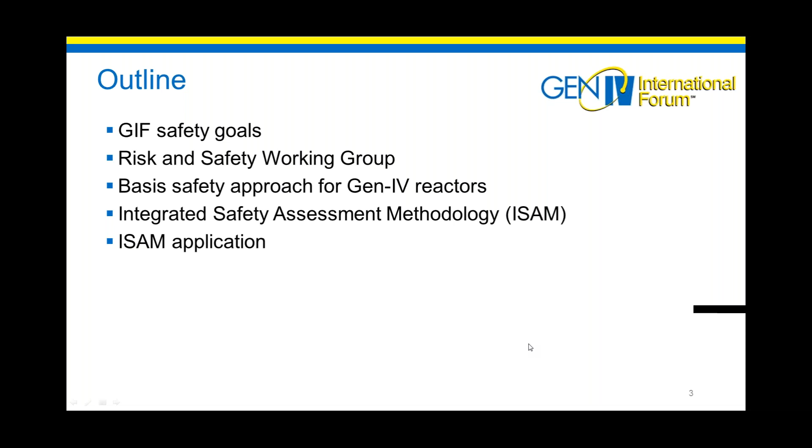So let's start with the recall of the Generation 4 safety goals. As you well know, at the beginning of GIF, a technology roadmap was drafted where a set of goals were put in place for 4 main domains: sustainability, economics, proliferation resistance and physical protection, and indeed safety and reliability. These goals were put in place to stimulate the search for innovative systems and also to motivate and guide the research and development on Generation 4 systems.

As concerns safety and reliability, we have 3 goals. The first calls for Gen 4 system operation that will excel in safety and reliability, systems that will have a very low likelihood and degree of reactor core damage, and finally, Gen 4 systems that will eliminate the need for offsite emergency response. We will shortly see the interpretation of these goals into the safety approach for Generation 4 systems.

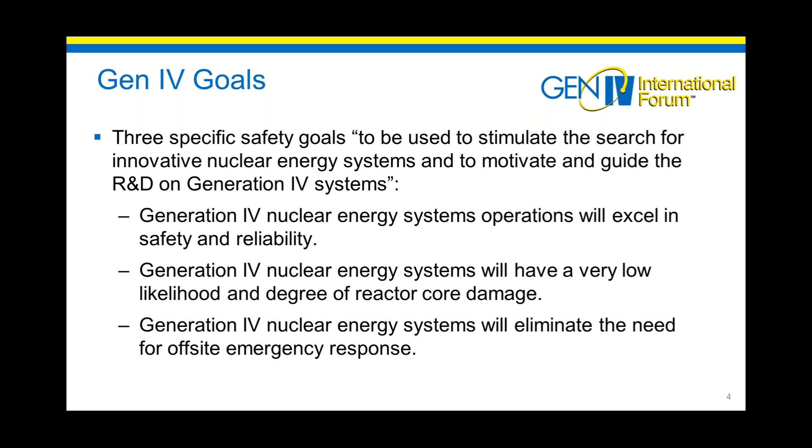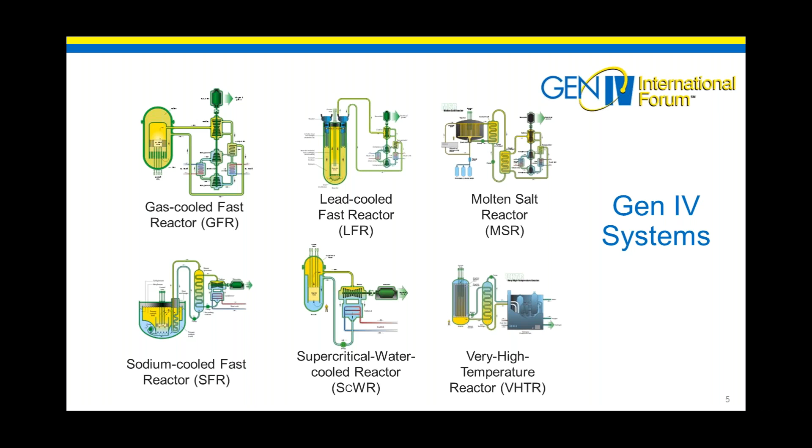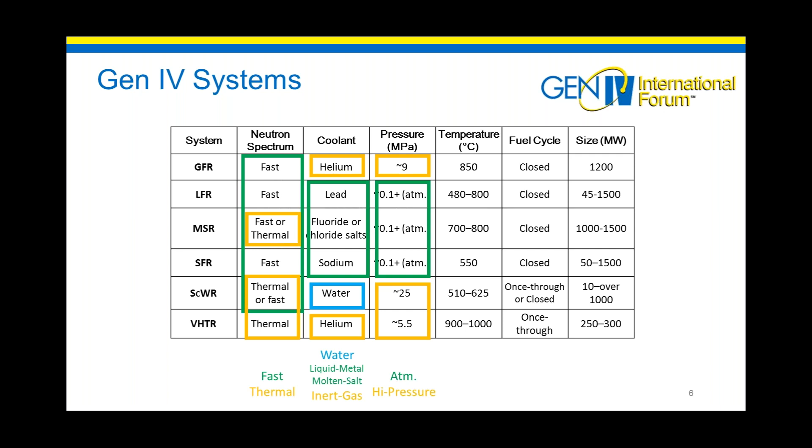But a first point that I want to raise is the fact that these goals, as embedded into the Generation 4 International Forum, should be applicable to all 6 Generation 4 systems, despite their very different characteristics. In fact, you can see in this table all the differences that the 6 systems have in terms of, in particular, neutron spectrum, type of coolants, and operational pressure and temperature, as well as differences in reactor size.

It's clear then there was a need to have a harmonized approach on safety for Generation 4 systems. And this eventually led in 2004 to the establishment of the Risk and Safety Working Group, which is one of the 3 methodological, cross-cutting working groups of GIF. The RSWG had in particular the objective to promote a consistent approach on safety for Generation 4 systems, define the safety principles and objectives based on Generation 4 safety goals, with a clear view to guide safety-related R&D activities, and finally the development of a methodology that could be technology neutral, and that could lead the safety assessment of Generation 4 systems.

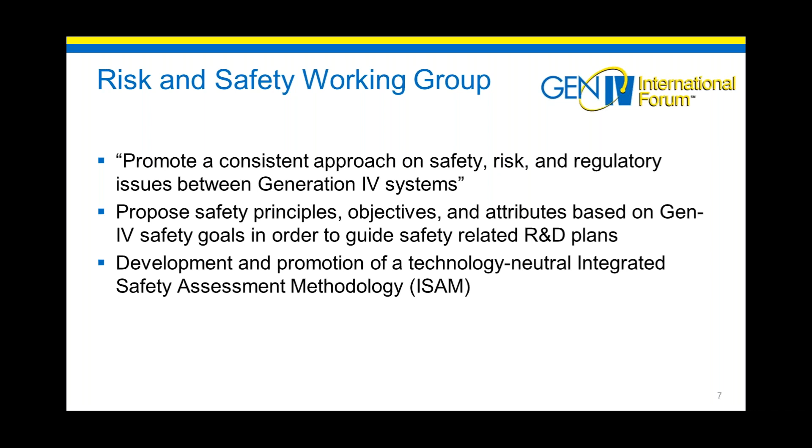Let's see now a bit more what are the main aspects of the Generation 4 safety philosophy as developed within the Risk and Safety Working Group. So, first of all, considering that the safety objectives of the so-called Generation 3 evolutionary light water reactors are already very ambitious, there are still margins for further improvement and then for a higher safety level for Generation 4 systems, considering essentially the combination of inherent advanced features due to the innovative technology and, very important, an early application of the safety approach, or a safety philosophy, so that we can achieve a robust design in a way that safety is already from the preconceptual stage built in the design itself rather than added on.

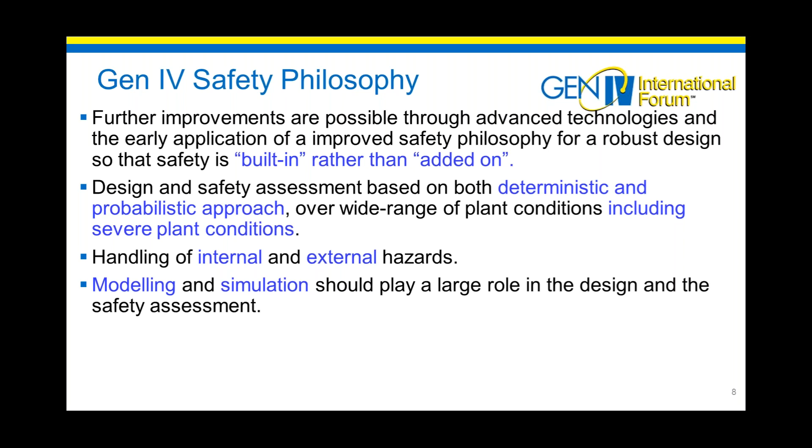In second instance, the Risk and Safety Working Group recognized the utility to base the safety assessment on both the deterministic and probabilistic approach, clearly to the extent and limits of the available experience in potential very innovative technologies. Another point is clearly that the design should address all plant conditions, including severe plant conditions. Design should also take due account of internal and external hazards and should make use as much as feasible of modeling and simulation activities in the design itself.

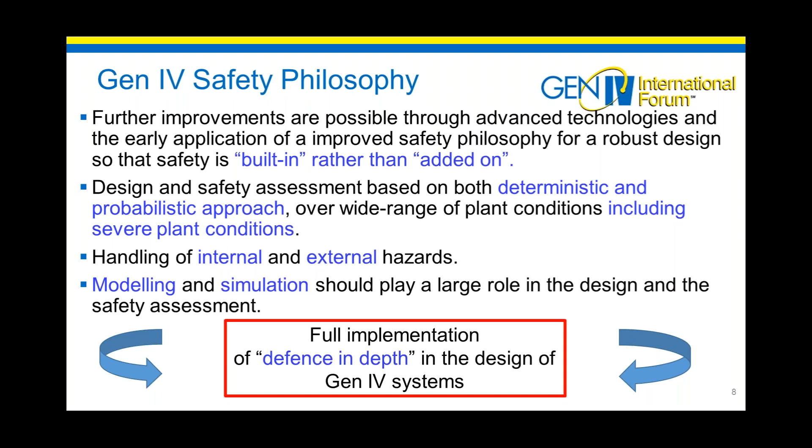In summary, all these attributes essentially call for a full implementation of the defense in depth already from the early design stages of Generation 4 systems. And this is somehow in line with the same safety and reliability goals that as well can be summarized as looking for an enhancement of the defense in depth in the design. In fact, when we talk about excellence in operational safety and reliability, essentially, we are addressing the safety during normal operation and anticipated operational events, focusing really on the reinforcement of level 1 and level 2 of defense in depth.

Then when we talk about very low likelihood and degree of reactor core damage, we want to minimize the frequency of the initiating events, introduce specific design features for the control and the mitigation of accidents in order to avoid core damage. So we want to reinforce level 2, level 3, and in general the design for severe accident prevention. Finally, when we talk about eliminating the need for offsite emergency response, we look at a comprehensive safety architecture that is able to manage and mitigate severe plant conditions and also reduce the likelihood of early or large releases. In this respect, we want, once again, to strengthen the level 4 of defense in depth, which is dedicated to the design for severe accident mitigation.

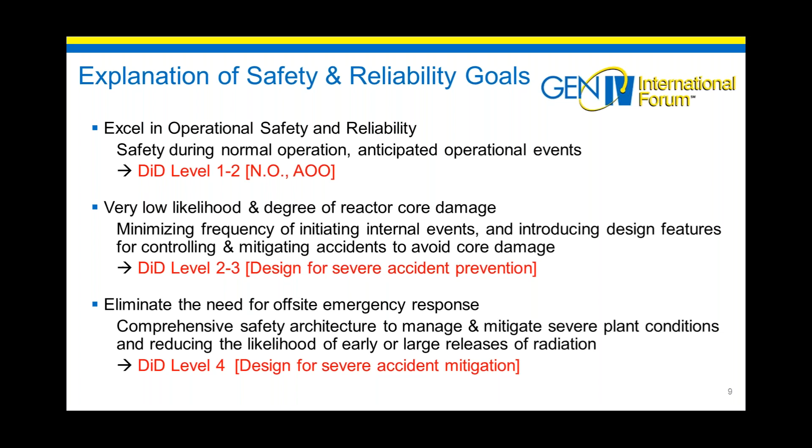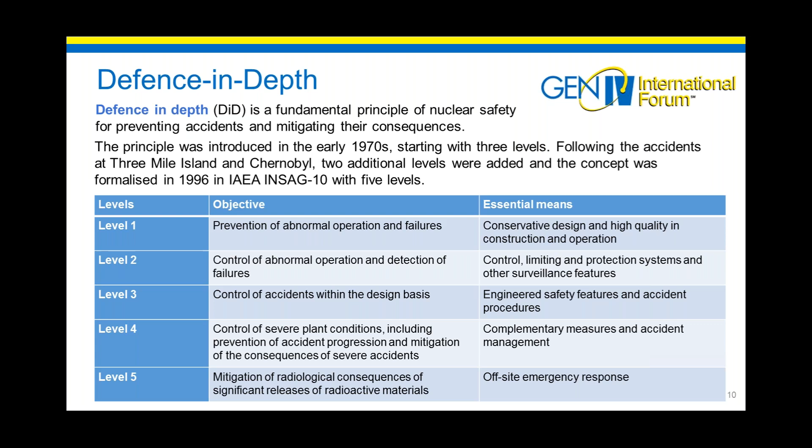So the defense in depth is already a fundamental principle of nuclear safety, and it must be preserved and even reinforced in the design of Generation 4 systems. Indeed, this is the key to achieve the safety robustness that will then lead to enhancement of the safety of Generation 4 designs. In addition, to meet these objectives, the defense in depth should be implemented in a way that is, first instance, exhaustive, so that all the risks that could affect the fundamental safety function should be identified in a comprehensive way.

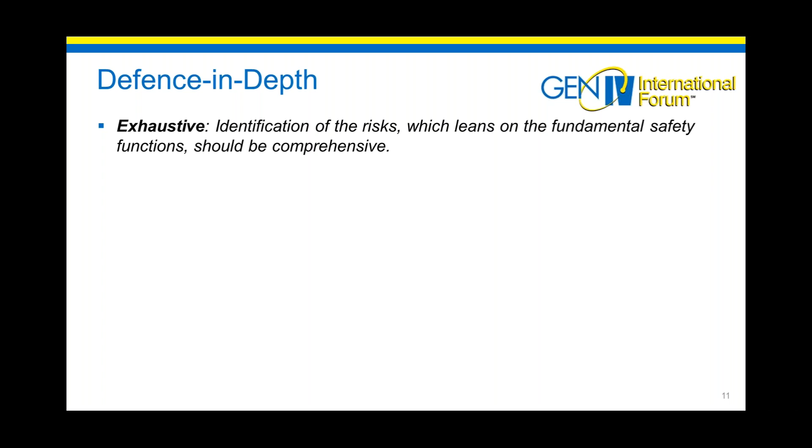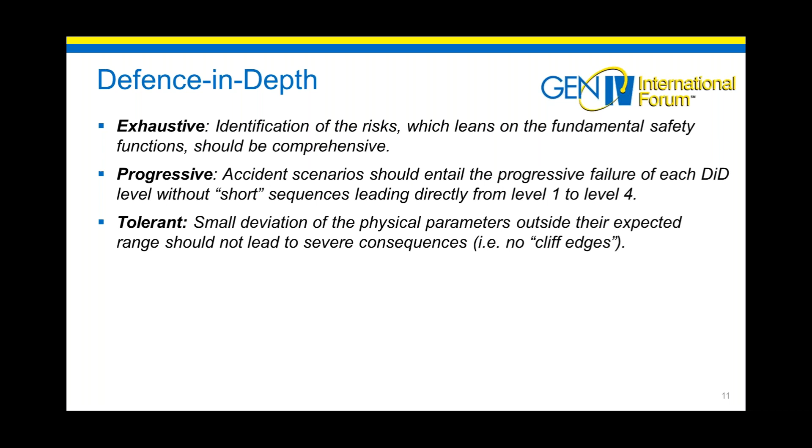The defense in depth should also be progressive in the sense that accident scenarios should eventually cause a progressive or sequential failure of each level of defense in depth, and therefore reducing the likelihood of this to happen, without having short sequences or kind of bypass leading directly from level 1 to level 4. Additionally, the defense in depth should be tolerant in the sense that any small deviation of the physical parameters outside the expected range should not lead to severe consequences. Essentially, we should not have any kind of cliff edge effect. Another important aspect is forgiveness. So assure that a sufficient grace period is allowed for manual intervention and repair during accidental situations.

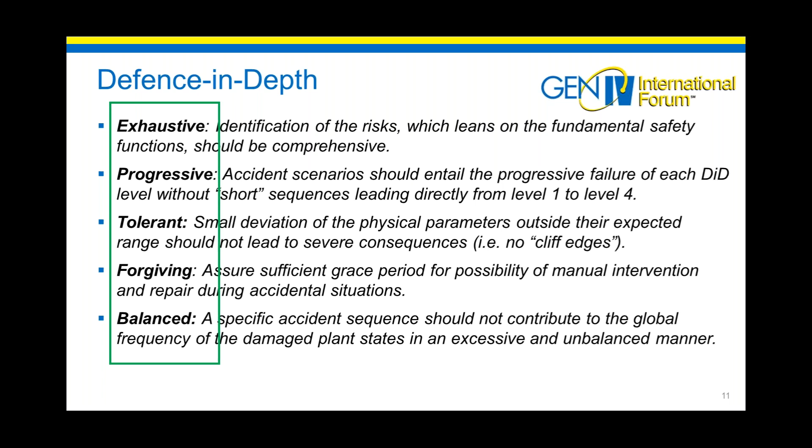And finally, the design and the defense in depth should be balanced in the sense that a specific accident sequence should not contribute in an excessive or unbalanced manner to the global frequency of the damaged plant state. These 5 attributes really reinforce the implementation of the defense in depth. And additionally, I will say the design of Gen 4 systems should also lead us as far as feasible to a simple design.

Take into account that generally simple design assures a higher level of robustness and safety. And this somehow differentiates Gen 4 systems from the high complexity experienced in particular for Gen 3 systems. I also want to highlight the fact that these attributes were actually defined in early 2008, but somehow they already answer the challenges that came after the Fukushima accident.

In fact, when we talk about progressiveness of the defense in depth, essentially we want to avoid any short sequence as what happened, for example, for Fukushima, as well as any potential for cliff edge effects when we talk about the tolerant implementation of defense in depth. And also in terms of forgiveness, to have enough time to be able to have manual intervention in case of a potential accident.

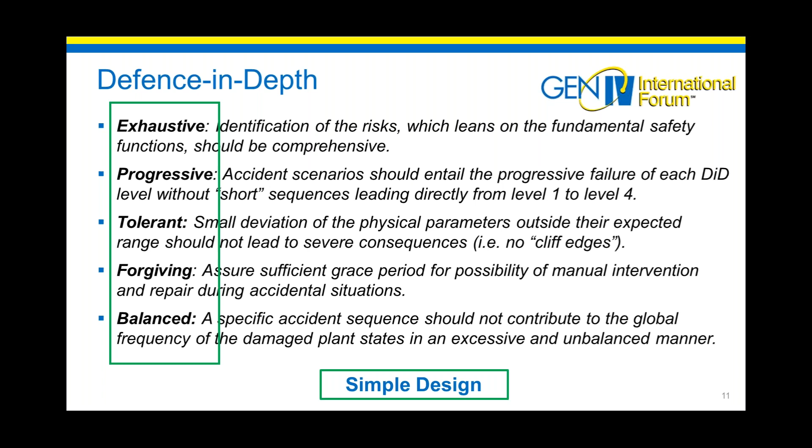Let's go now more on the basis for the design and assessment. Clearly, the design of Generation 4 systems should cover the full range of plant states, including severe conditions. And special attention should be given to severe plant conditions with the implementation of specific provisions that could be put in place against such conditions.

Additionally, all internal events and internal and external hazards have to be considered, together with eventual uncertainties that are related to the innovative features of a new technology. And this should be put in place in particular through a combination of both experimental and modeling activity. Finally, a special effort should be made in particular for the demonstration of the practical elimination of all those accident sequences that can be associated with the potential for early or large releases.

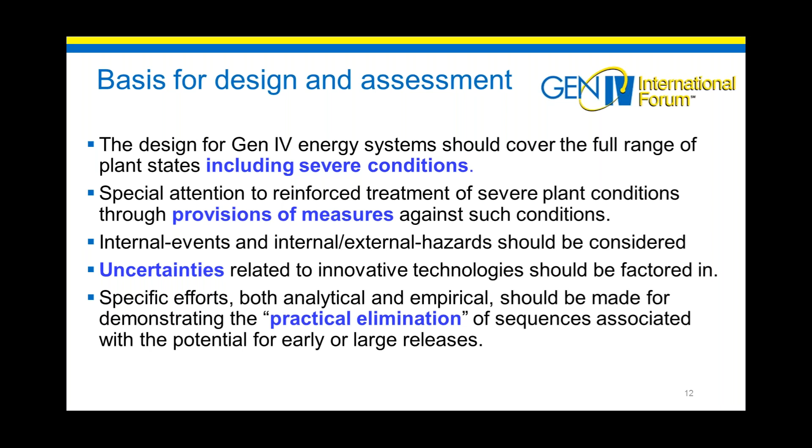So looking in particular at the plant states that Generation 4 systems should cover, essentially these go from normal operation all the way to design extension conditions, while out of design are essentially all the residual risk and practically eliminated accidents. I would like to spend some words about the notion of severe accident. In fact, some Gen 4 concepts can clearly associate the notion of severe accident with that of the light water reactor, associated with the melting of the core.

However, designs like the VHTR and the molten salt reactor cannot express potential severe accident conditions through the melting of the core, given their design characteristics. However, this doesn't mean that a severe accident, which is intended as an accident that goes beyond the design basis, cannot be postulated.

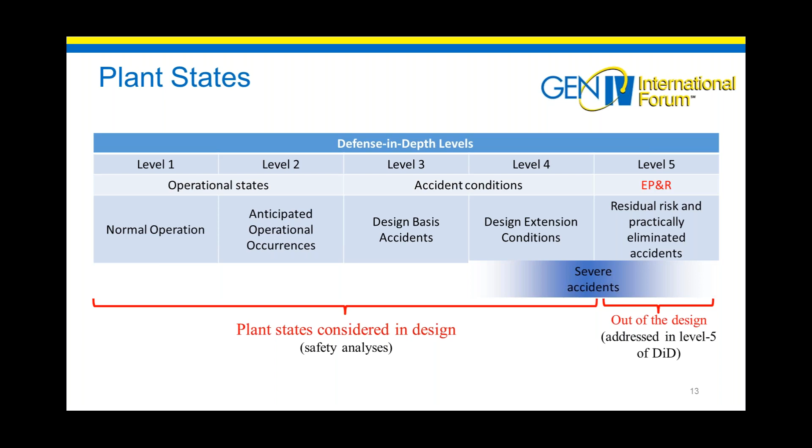So in any case, potential sequences that go beyond the design basis need to be assessed, but it's important to notice that according to the characteristics of some design tracks, the potential severe accident scenario can be put in level 4, so within the design extension, but can also be put in level 5, so out of the design itself. What is essential in the assessment is that the possible severe accident scenario is indeed considered and evaluated in a global design assessment.

So we have seen essentially what are the main principles of the safety approach for Generation 4 systems. We see now how we can assess within our design those principles. And this is essentially linked to the development of the ISAM, the Integrated Safety Assessment Methodology, that had the objective to ensure a consistent approach to safety applied to all 6 systems.

The methodology consists of 5 tools. They are not, let's say, new in their formulation, maybe with the exception of the QSR, the Qualitative Safety Requirement Review, and the Objective Provision Tree, or OPT. But actually it is really the systematic use of these tools that should ensure the consistency of the design with the safety approach for Generation 4 systems.

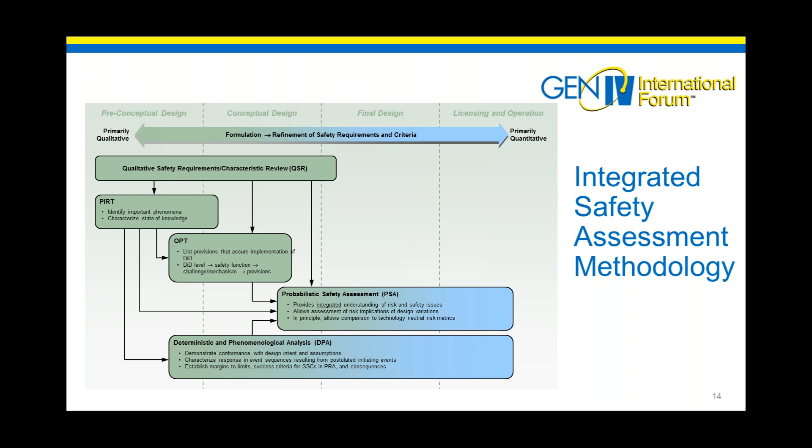The set of tools can be used separately, and essentially the methodology covers the entire cycle from the preconceptual design all the way to the final design, licensing, and operation. I will just shortly introduce each of these tools, starting with the qualitative safety characteristics or safety requirement review, or QSR.

Based on these tables, any specific design feature, so design characteristics, design system, and so on, can be assessed against the current requirements, the current regulatory framework, to see to which extent the system is in line with the current requirements.

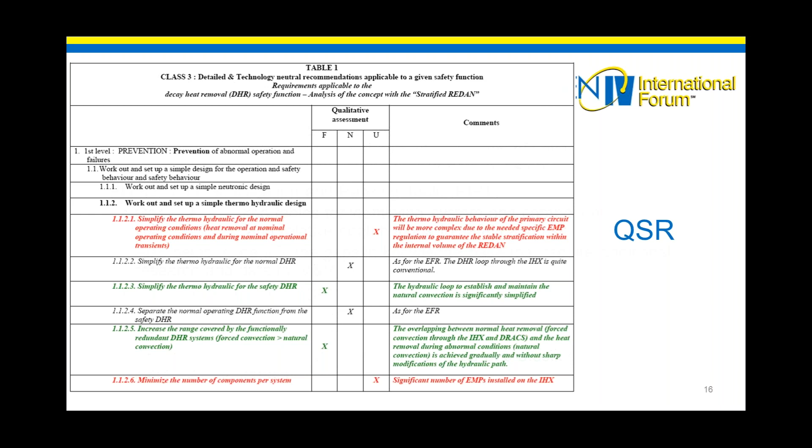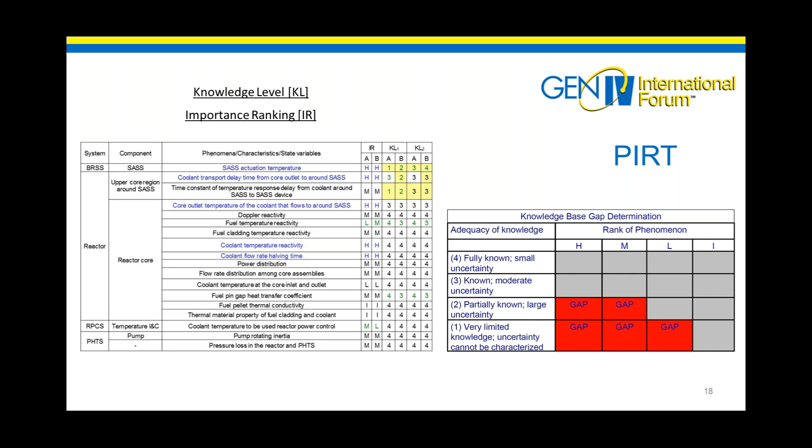The second tool is quite well known: the phenomena identification ranking table. It is a quite powerful tool to identify the gaps in terms of importance of phenomena, as well as level of knowledge of those phenomena. Indeed, this tool is quite interesting, quite powerful, to identify any potential R&D needs dedicated to the level of knowledge of important phenomena.

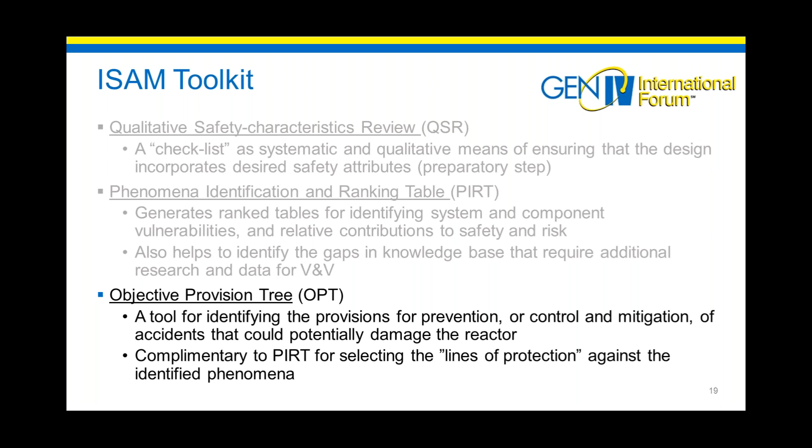Then the third is the objective provision tree. This is a rather qualitative tool that gives a graphical representation of the safety architecture, so the set of provisions that are put in place to prevent, to control, and mitigate potential accidents. In addition to identifying the risks or the initiating events, you also put in place all the potential lines of protection

against specific mechanisms. So graphically, we have each level of defense specified in terms of specific objectives to be achieved and barriers that need to be protected. And then for the different safety functions, in the OPT, we identify the challenges to cope with and the mechanisms, essentially the initiating events, that need to be prevented or controlled through a set of provisions that can be material, in the sense of system features or components, or immaterial, in the sense of procedures put in place in order to prevent or control the mechanism itself.

This is a very powerful tool because it gives an overview of the safety architecture, as well as identifies the independence of the different levels of defense in depth, and potentially identifies common cause failures that need to be addressed and can then be addressed in advance.

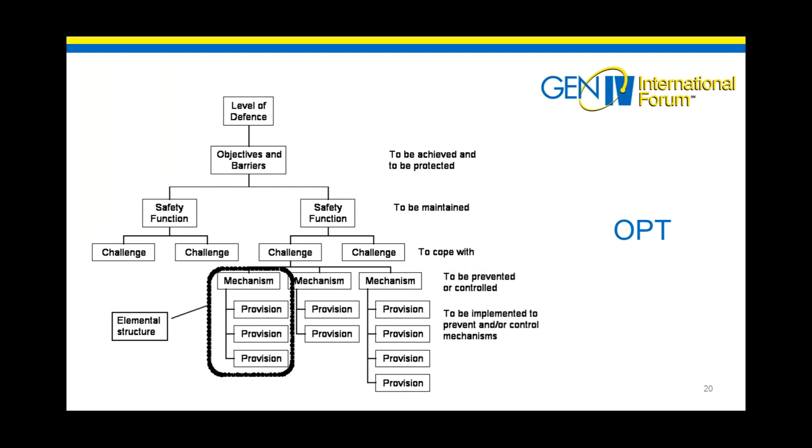And finally, we have the two remaining tools: the deterministic phenomenological analysis, which is the traditional safety analysis used to assess the response of the system to the different challenges, and the probabilistic safety analysis that defines the risk spectrum of our design, in particular to answer the three basic questions: what can go wrong, how likely is this to happen, and what are the potential consequences.

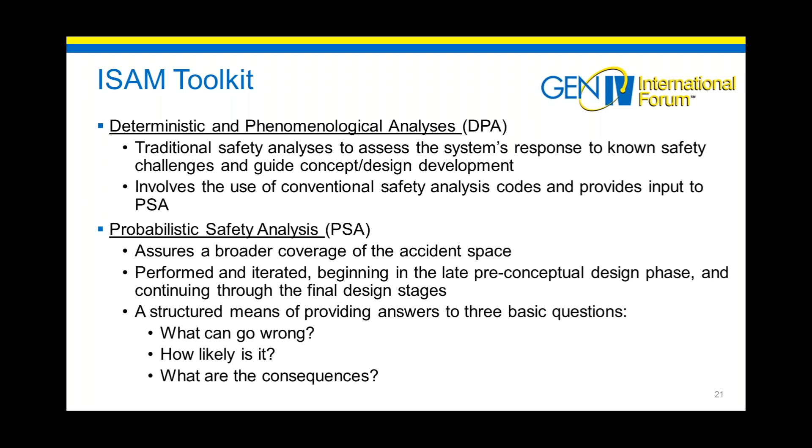So you can see here that the methodology is really a combination of deterministic and probabilistic. It has the flexibility to enhance one or the other aspect based also on the level of maturity of the methodology itself. So these are the tools. We'll see now how these tools can be applied to the safety assessment itself.

To do that, we need a definition of safety assessment. This comes from the IAEA, which identifies essentially two steps in safety assessment. The first step is the verification of the compliance of our system with the principles, the requirements, and the guidelines of the current regulatory framework.

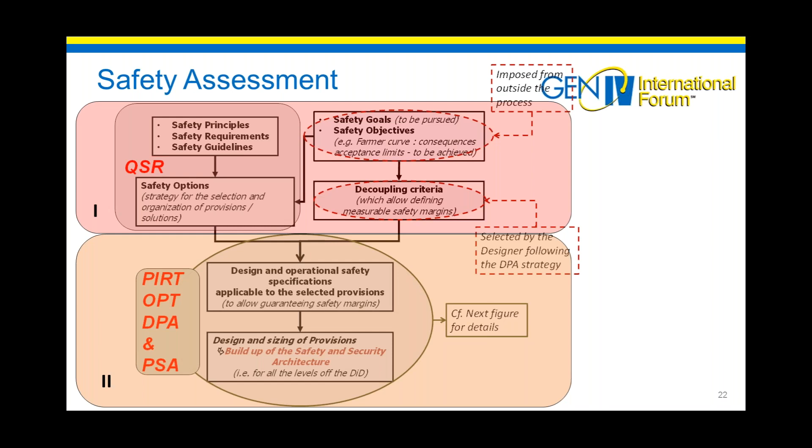The second step is the verification of the conformity of the safety architecture with the expected quantitative safety objectives. So to say, the design criteria that are put in place for each level of defense in depth, in terms of characteristic temperatures to achieve in case of accident, or in the later defense in depth levels in terms of potential release to the environment.

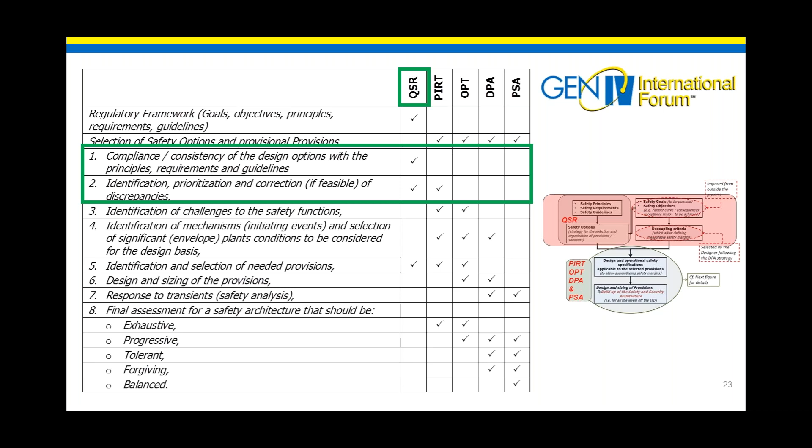In this table, we have the cross-cutting relationship between the different steps of the design and assessment process and the respective ISAM tools. In first instance, once the goals, objectives, principles, so the regulatory framework, are put in place and a set of safety options or design options are identified, the first step, as we said before, is to verify the compliance with the current requirements. This is mainly the domain of the QSR, where this compliance can be verified and a process of identification and correction can be put in place.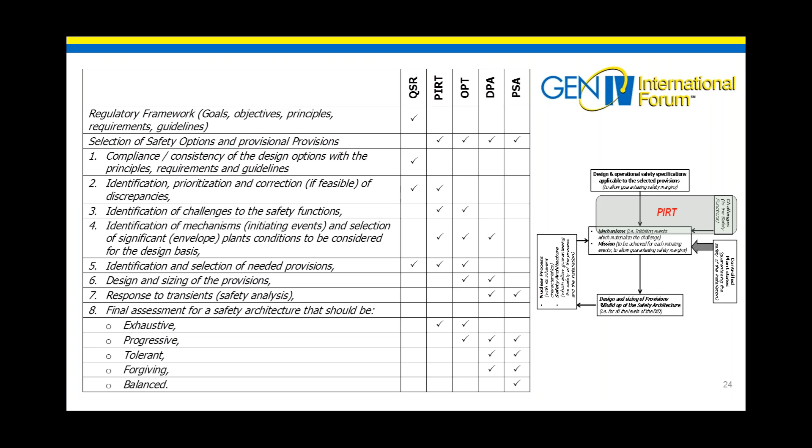Once the safety options, the design options, are put in place, then the design itself kicks in. So we have first the identification of the challenges for the safety functions, as well as identification of mechanisms, or the initiating events and plant conditions to be considered in the design. This is mainly the work that can be performed through PIRT exercises together with the OPT exercise, taking into account that the OPT also identifies, in a qualitative way, the set of provisions that are put in place in order to cope with, to prevent and to control the mechanism.

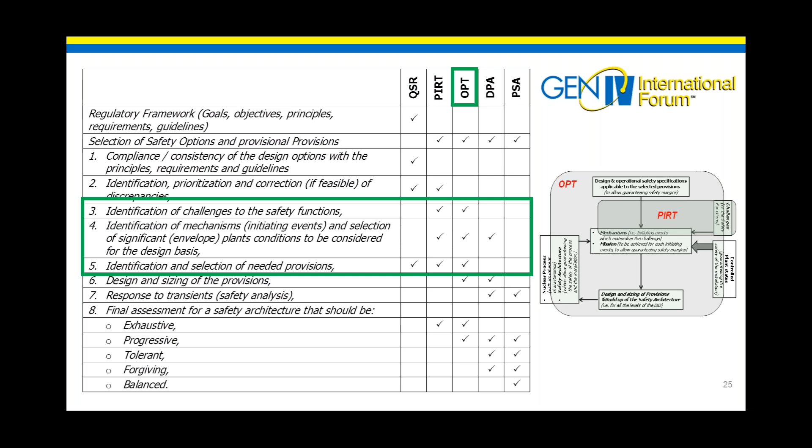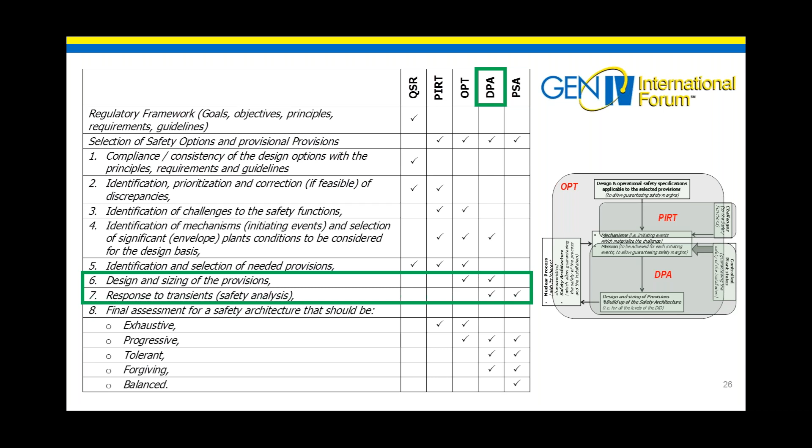Once this is done, and the safety architecture is in place, then we have the design and sizing of the provisions themselves and the analysis of the response to the transient, which is the classical, let's say, safety analysis. And this is done through the combination of deterministic studies as well as probabilistic studies, with the final assessment of the safety architecture that should be, as I said before, exhaustive, progressive, tolerant, forgiving, and balanced.

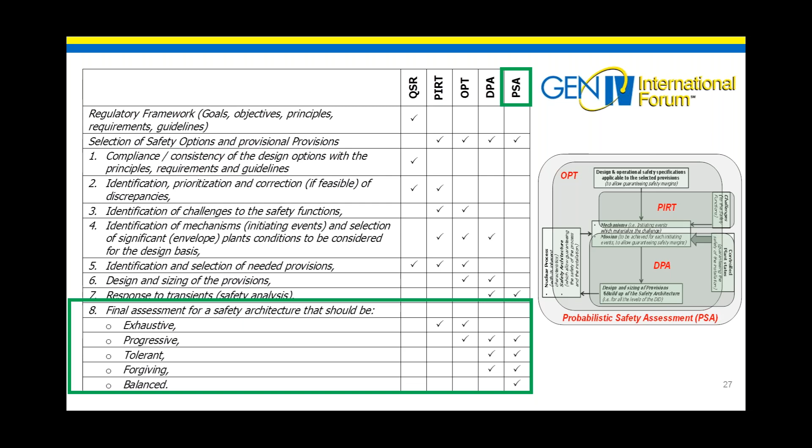It's clear that this process is an iterative process. By itself it can be very lengthy and generally time and resource consuming. But it is this way that, in a systematic way, should really ensure the robustness of the design itself.

I want to conclude with a practical example of the use of ISAM. This example actually comes from our Japanese colleagues. Please don't look at the technical detail, but rather at the use of the different tools. So the reference design is the Japanese sodium fast reactor, a loop type SFR, and in terms of decay heat

removal system, it has two primary reactor auxiliary cooling systems, so-called PRACS, that are linked with the intermediate heat exchangers, and one direct reactor auxiliary cooling system, also called DRACS, which is directly immersed into the reactor vessel.

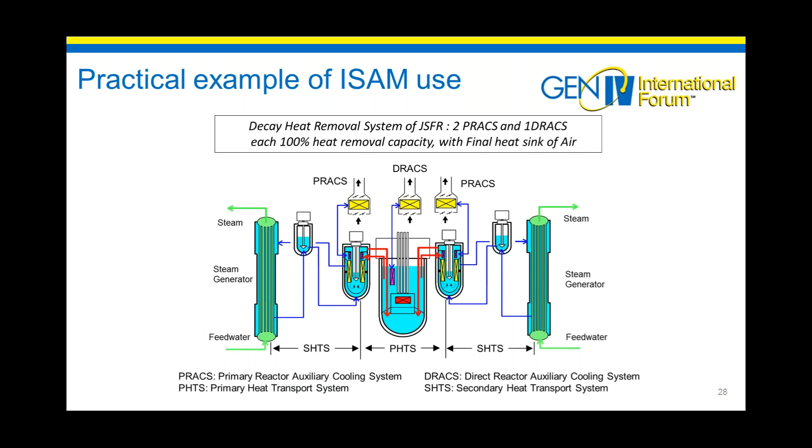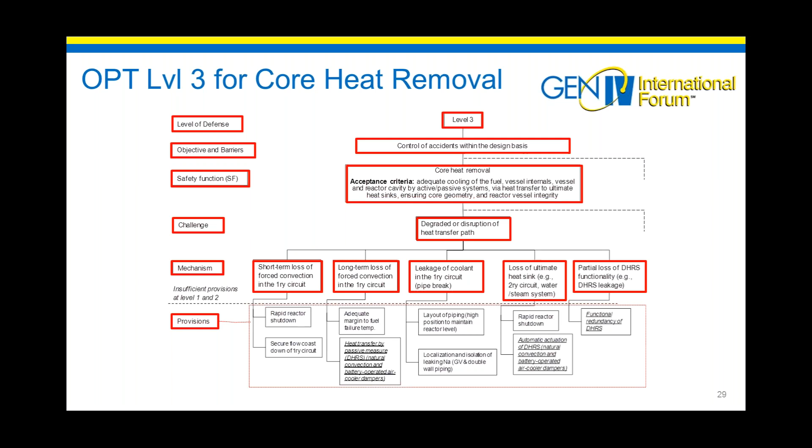So the first activity was really to identify the different challenges and mechanisms and, through the OPT, identify the set of provisions to be put in place in order to cope with these mechanisms. This is an example developed for level 3, for the core heat removal in terms of fundamental safety function. Then the analysis was focusing on the protected loss of heat sink,

considering here we are in design extension conditions, so with the failure of one of the PRACS. So the exercise wanted to assess the short-term potential loss of cooling, and to assess the capability of keeping the integrity of the core using the remaining PRACS and DRACS, both of them or either one of them.

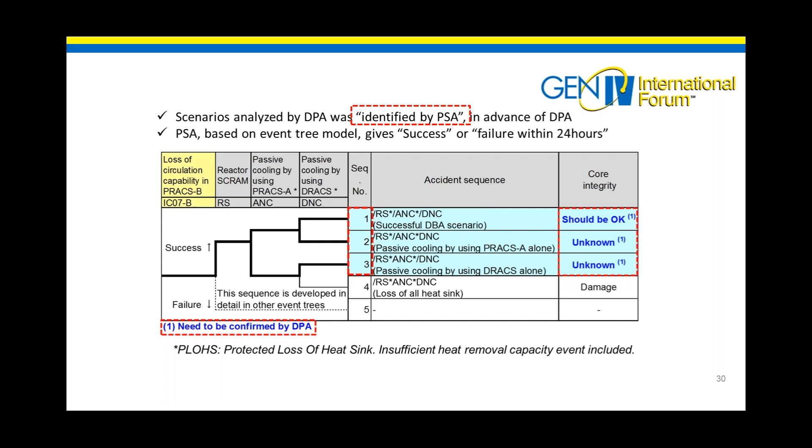So the scenarios analyzed by the deterministic study were identified by the PSA through an event tree, a PSA analysis that gave the success or the failure within the 24 hours. So the scenarios were identified and assessed through the DPA, which showed that essentially only in case of operation of both the PRACS and DRACS could the core integrity be guaranteed, while all the other cases

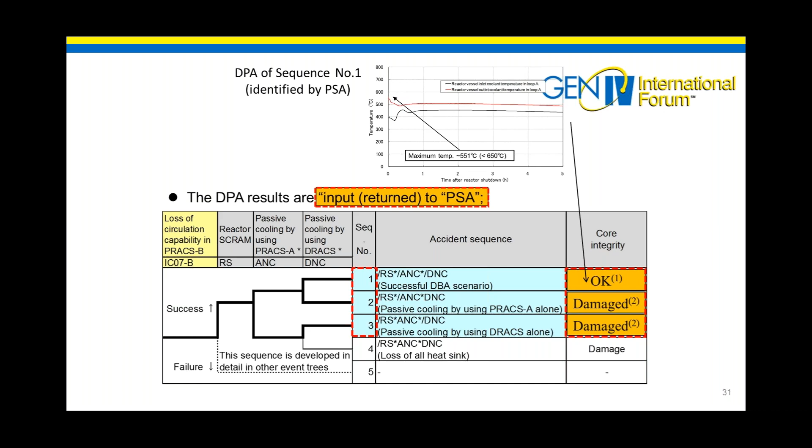would lead to damage. In particular, for the initial design, the PSA results related to the protected loss of heat sink showed a core damage frequency of 5 × 10^-7 per reactor year, with a heavy contribution of the short term, so of the sequences that occur within the 24 hours after reactor shutdown.

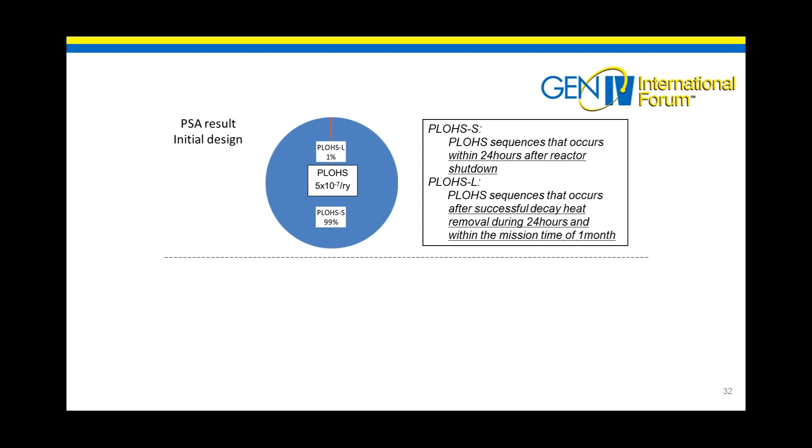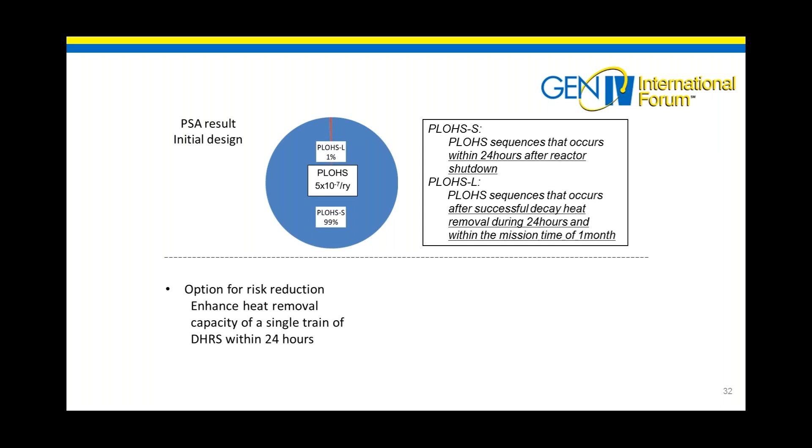In order to improve these values, an option was to enhance the heat removal capacity of a single train within the 24 hours through the addition of non-safety related air-cooler blowers with associated short-term batteries.

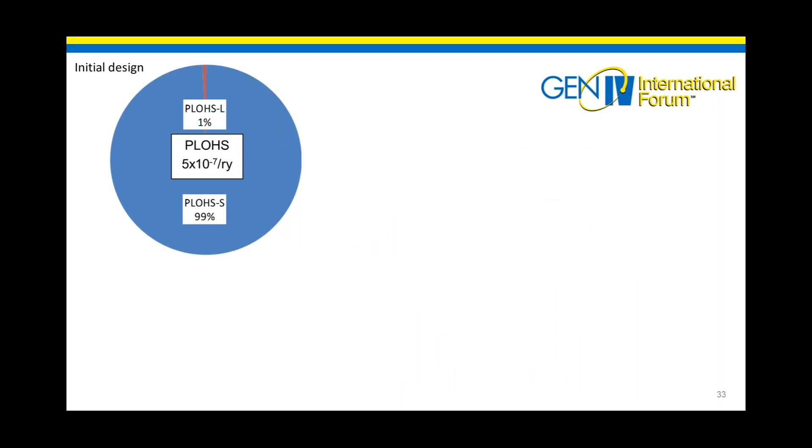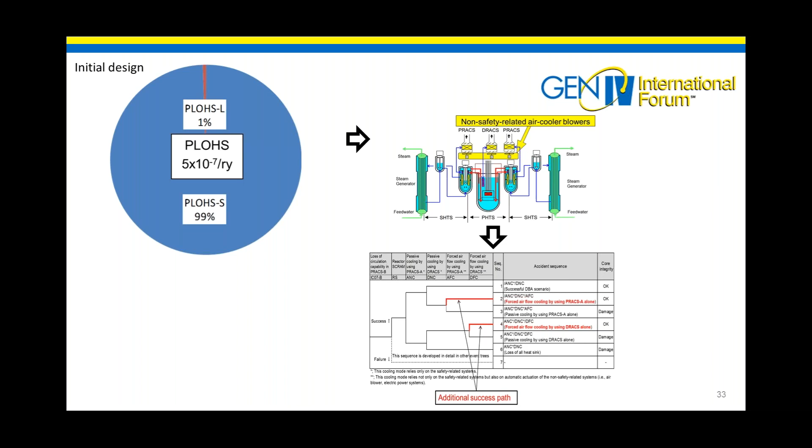In this way, from the initial design, with the application of these non-safety related air-cooler blowers, it was possible to add additional success paths that eventually led to a reduction for the protected loss of heat sink to 9 × 10^-9 per reactor year, so about 50 times less than before.

This is a very, let's say, simple example of how the combination of OPT for the definition of the provisions and the challenges, and DSA and PSA, could indeed help to build in the safety.

We reach now the conclusion of this webinar. So, in summary, the Risk and Safety Working Group aims to reach a high level of safety through essentially the combination of the inherent features of the advanced technology with the early application of an improved safety approach. And this is done essentially through a full and systematic implementation of defense in depth, in such a way that safety is built in rather than added on.

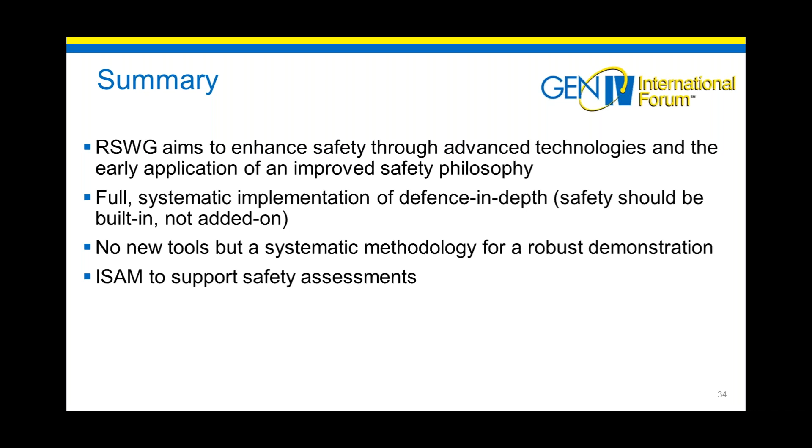As concerns the ISAM methodology, we don't really have new tools, but it's the systematic approach in the use of the methodology that assures a robust demonstration. And the use of ISAM can indeed support the safety assessment. I want to conclude my webinar with just an overview of the ongoing activities of the Risk and Safety Working Group.

In particular, we are working now on the update of the basis safety approach for Generation 4 systems. This document was actually produced in 2008. The idea is really to take into account the lessons learned from Fukushima, as well as the evolution of the regulatory framework in the last 10 years.

And then other reports are done in collaboration with the individual system steering committees. To date, we have the white paper related to the pilot application of ISAM methodology. The objective is really to demonstrate the applicability of ISAM as a self-assessment for each of the 6 Generation 4 systems, and provide guidance on improving the safety aspects of the Gen 4 systems using ISAM.

And then the safety assessment reports for the 6 Generation 4 systems, that is a kind of a snapshot of the characteristics of these systems, of their challenges, and the remaining R&D needs. And finally, the contribution that the group is giving to the definition of the safety design criteria for the SFR within the dedicated task force, and directly in collaboration with the SSCs for the other designs.

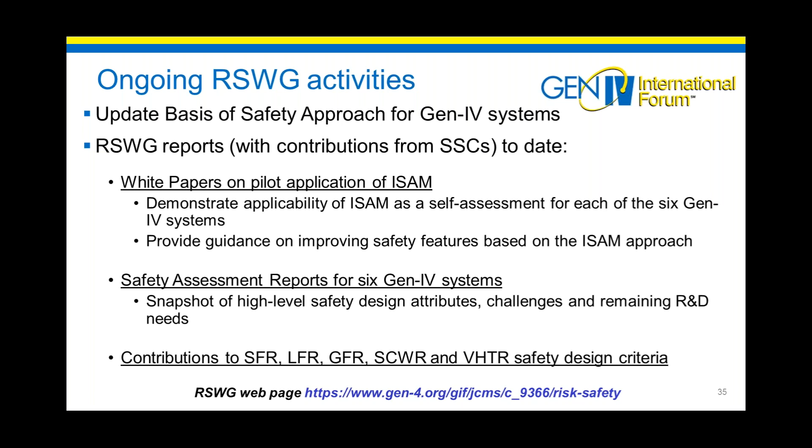Finally, you see here the direct link within the GIF portal to the web page of the Risk and Safety Working Group, where you can find all the documentation developed by the working group over the years. This concludes my webinar, and thank you for your attention.

And I'm open to see your questions, answer your questions.